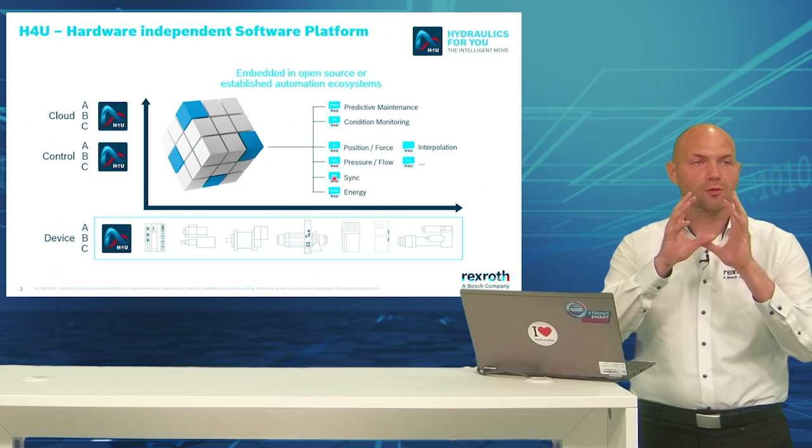What you can see on this slide, on the right hand side here, it mentions that with our H4U software products, we can really run on several devices. So we are hardware independent. This is what you can see at the bottom. Our knowledge that we have in hydraulics, and this is only an example. So everything where we think that we have a big knowledge, we can put into the software, and then we can decide to bring that to several devices, or even to different controls, PLCs, and also into cloud services. This is the general idea of it.

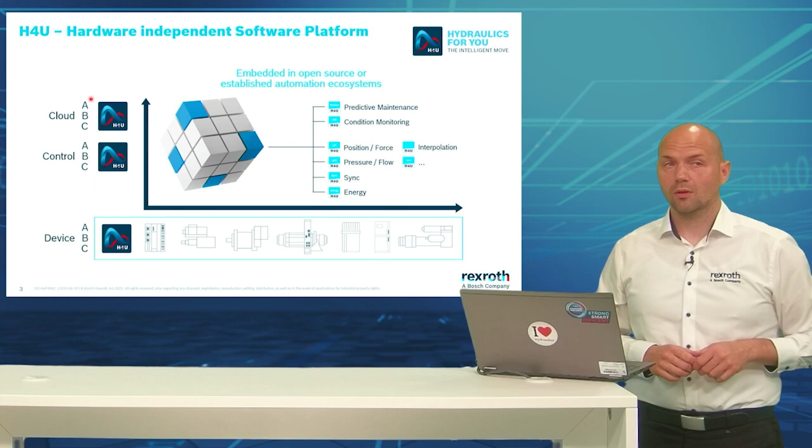And I'm sure it has a lot of benefits and you will talk about it, but now it's again time for an interaction part. We would like to have your answer on what are the most important features of a hydraulic software product today. So is it the functionality, maybe the price, the ease of use, or the flexibility? What will be the most crucial feature you're also willing to pay for? Let's wait for some more seconds. We have 70 people in, 23 answers yet.

It's quite close. Again, like in soccer yesterday, it was crazy.

Okay, 35, so 50% voted. Interesting, very interesting. We talked about this in the preparation. It looks like the ease of use, I think that's what you said. It's a very big element, but the price is not the biggest one. No. And it's even the last one. So that's interesting. So ease of use, functionality, and flexibility kind of on the same level, and then the price. That's a little bit surprising, I would say.

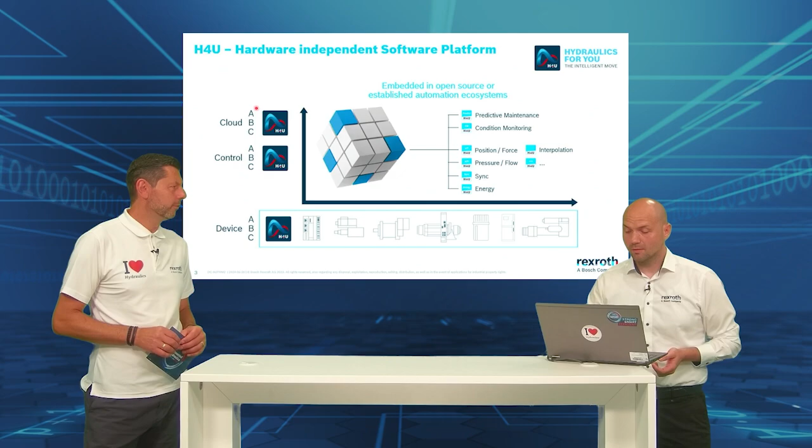Yep, it is. Okay, but from your perspective, what are the biggest benefits of using this platform? Is it the ease of use? Is it flexibility? One very important point for sure is the flexibility, because with these software function blocks, and this is what you can see on the left-hand side, we allow you to integrate our functionality in your control PLC system.

And with that, you can control your actors and read in your feedback signals, your sensors. So you are more flexible, you can choose. It's not a must to do that, but it's an additional way you can do it in future. In the past, in most cases, we brought our hydraulic functionality with our devices, but now we enable you to put this functionality into your machine concepts, and this gives you more flexibility.

And for sure, you can use your existing machine control, and with that we also reduce efforts during the engineering phase, and this saves you a lot of time, because I think the employees in your companies are aware of the engineering tools, and they don't have to learn a new tool.

And last of all, a very important point is we have prepared our function blocks especially so that they fit perfectly to our hydraulic components, especially valves, cylinders or pumps. So we have something like a database in our function blocks where they can communicate with each other.

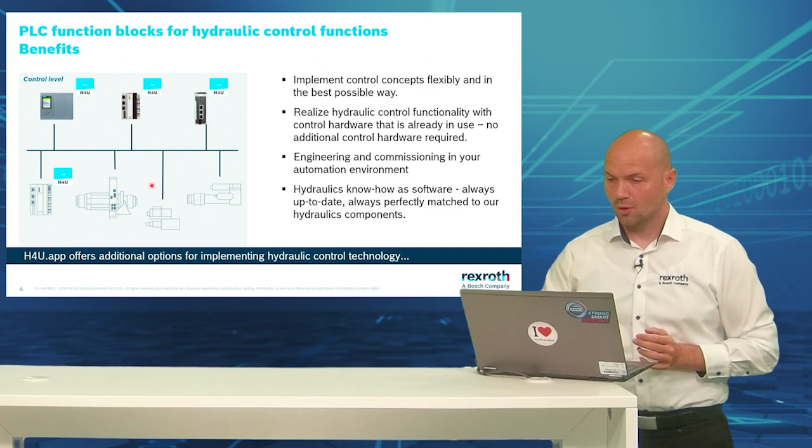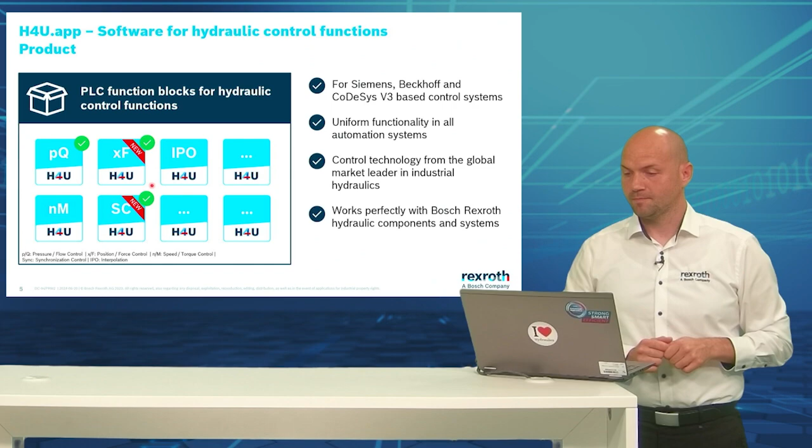So what we see here is the news compared to the last time. You have new products in, as we say. But I also see some icons with 3 dots. That means you're not done, I would say. My question would be, how would you decide on the new functionalities, the new products on this platform?

Yeah, like you mentioned, it's only a starting point where we had some customer feedback and customer interviews. And from that point, we started with what we thought were the most important functionalities, but we are not at the end. So we need your feedback, I would say, to know what could be the next steps on the roadmap.

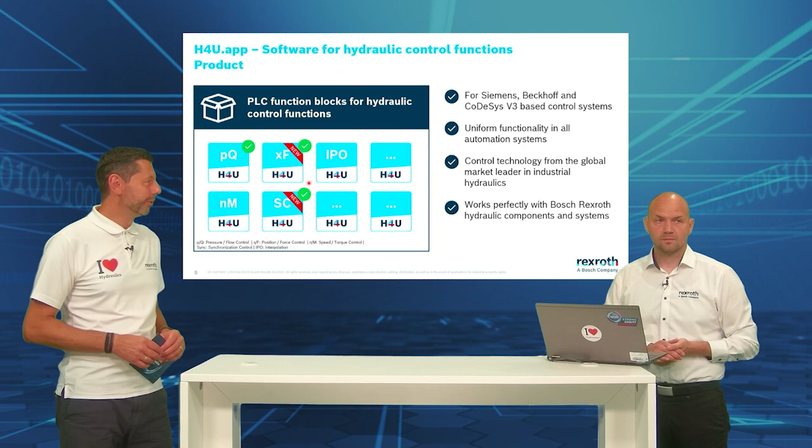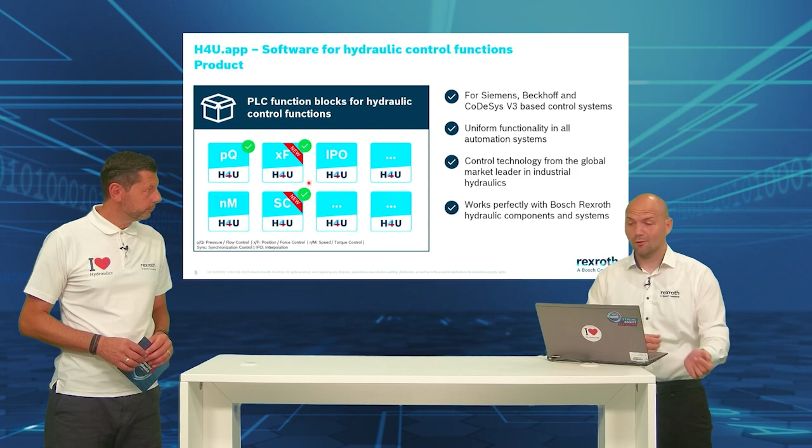Okay, so what will you do next? What would you say? Let's start with the first one. Yeah, let's look at the position force controller. Okay.

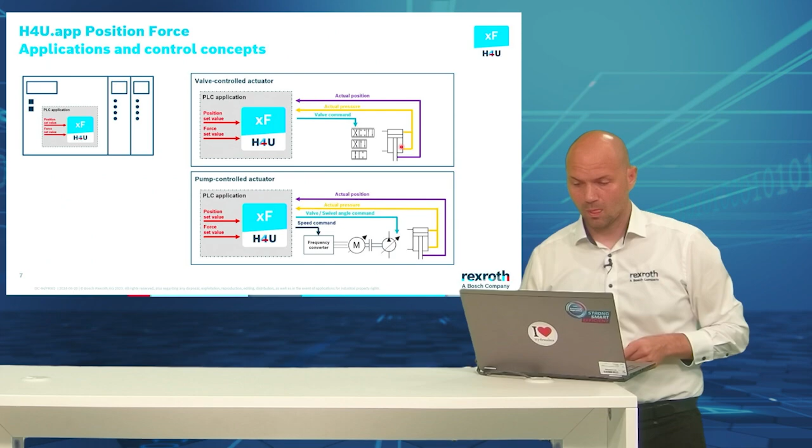Because we have a wide range of application requirements, the position accuracy could be millimeters or down to some micrometers. So a big range. Also the velocity could be 10,000 millimeters per second, going down to 0.1 millimeter per second. Also the force can have a big range.

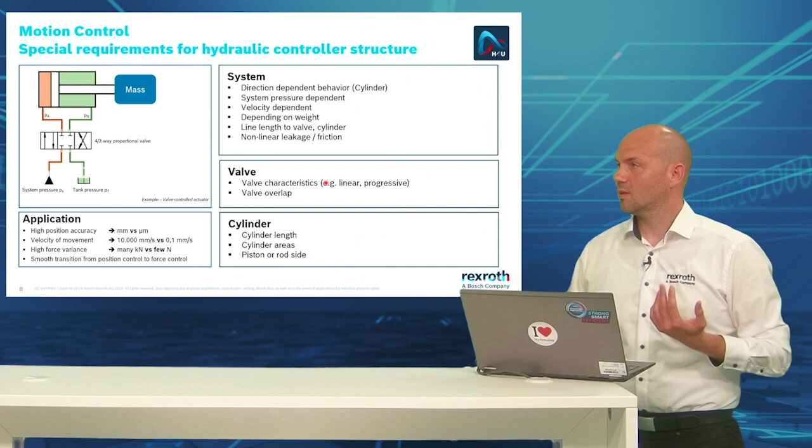And these are a lot of things we have to take care of in the control system. But also, the hydraulic system by itself has some special things to take care of. So the direction-dependent behavior of the cylinder depends on the mass mounted, the length of the lines, and also the valve characteristic. So the valve characteristic influences all of that, and everything is taken into account in our control structure.

Thanks for this. I saw a presentation some time ago where you talked about best-in-class hydraulic control. Based on this, how would you answer the question: what makes you best in class here?

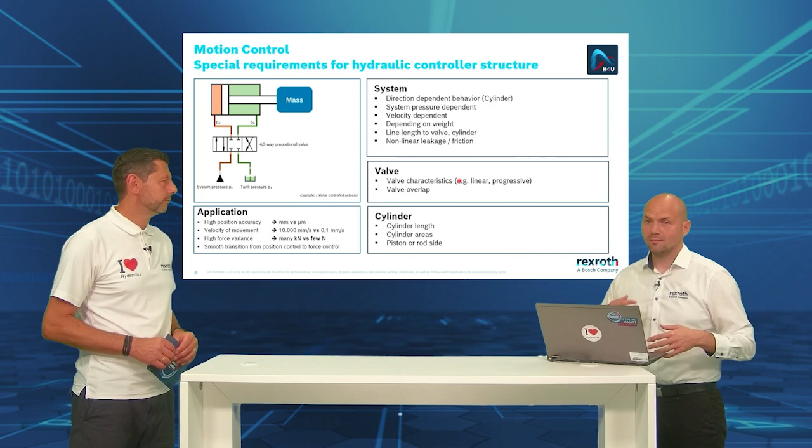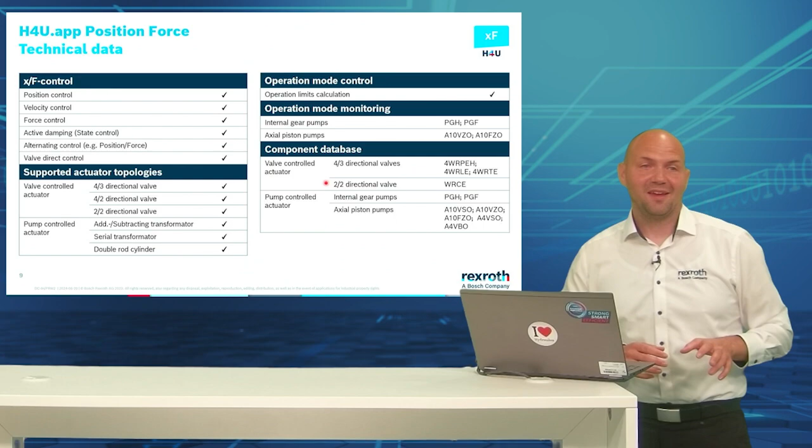Yeah, for sure we have some big benefits, and to answer that question I brought the technical data with me. We have engineers here, so I don't want to go too much into detail, because at the end there's a link to the complete data sheet where you can see all this data. But I think three very important functions that allow you to handle your application well are: first, the position force control with alternating control.

Really, the smooth switching between position and force is a very important feature. Then, for sure, the state control. So if you have application cylinders with a low frequency, this allows you to handle this application and make the control in a good way.

And last of all, I would say the component database is a very nice feature, because you see a short overview of the different valves and pumps we have, and you can easily select one component out of this database. This saves time during commissioning, and you don't have to put in so many parameters.

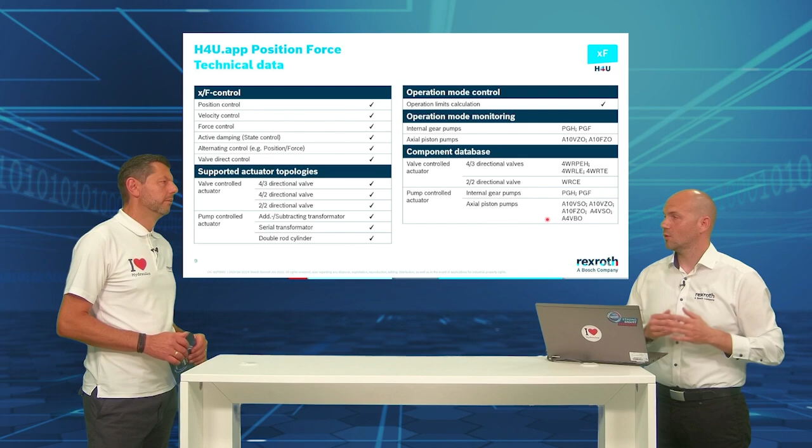Okay, quite valid points, I would say. This technical data is just an excerpt. I think you have a big data sheet available, and we will show where you can find it at the end.

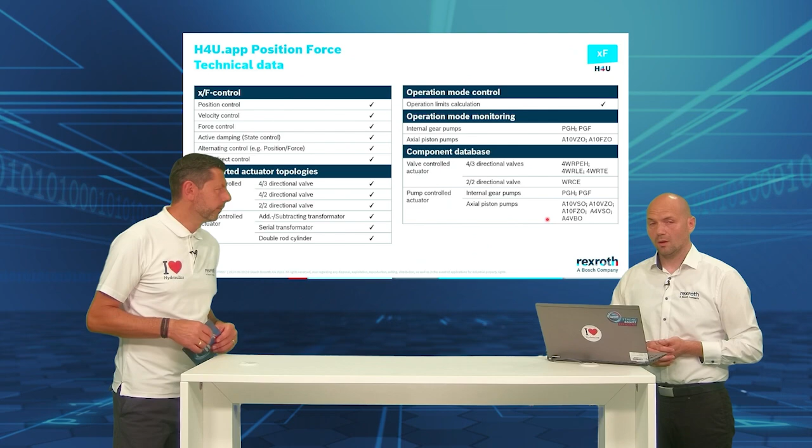So this was XF. There's another one, SC, sync control, or synchronization control. So what about this one?

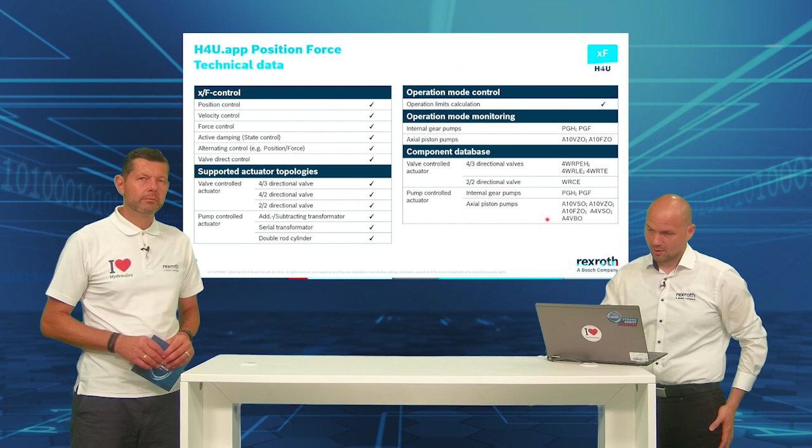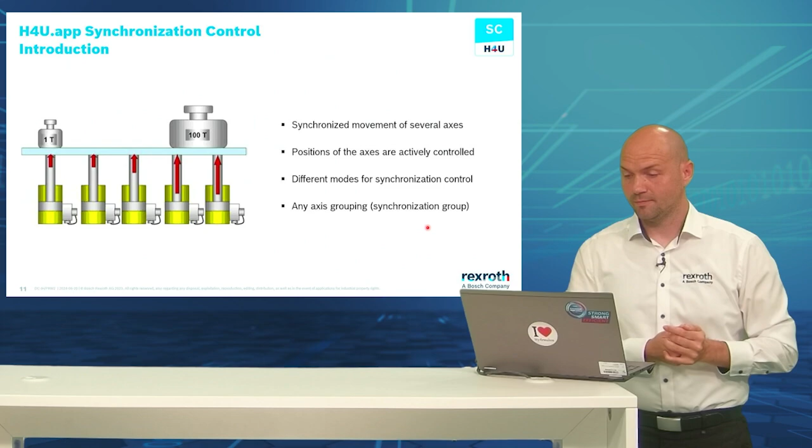So that you have a feeling of how this operating principle works and how you will integrate it: first of all, we need a standard axis controller, like a position force controller, for every single axis. If this works fine independently, then in a second step we integrate the synchronization controller into our PLC applications. This acts like a master, controlling the slave axes below. This minimizes the synchronization error, even if a different load is distributed on your application.

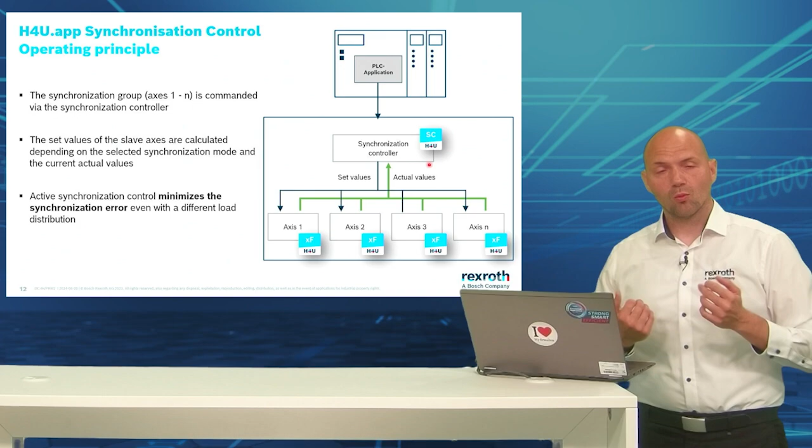Good. Maybe you are wondering, because the range of applications could be completely different and the requirements would be completely different for synchronization mode. For that, we have some important modes integrated into this functionality. I don't want to go too much into detail, but I want you to understand that there are some different ways to solve your application tasks.

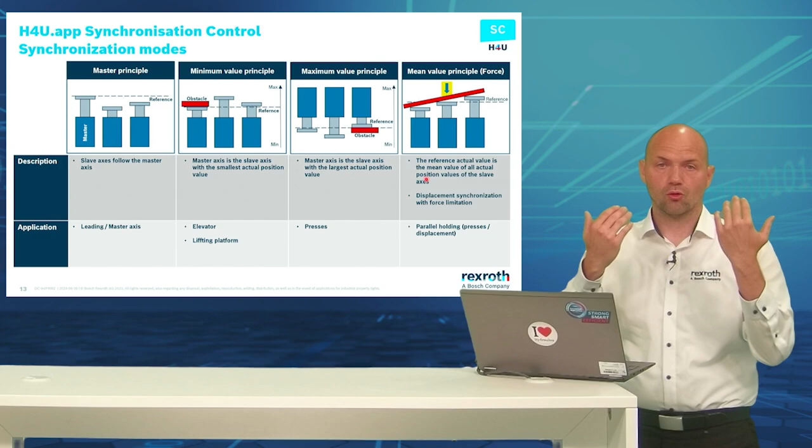So one principle would be the master principle, where every time one axis is the master. Then a second principle is the minimum principle, typically used for elevators or lifting platform applications. The maximum value principle is used when the cylinder comes down from up to down, something like in presses. And then there's also a special mode, the mean value principle, used in presses where we have displacement synchronization. So it's a synchronization mode combined with force, special for press applications.

I like that you show these application examples here already. I think we will have a specific one in some minutes. So this was a lot of info, I think. A lot to digest.

All right, right now I don't see any questions in the chat, so it looks like people have to digest, as I said.

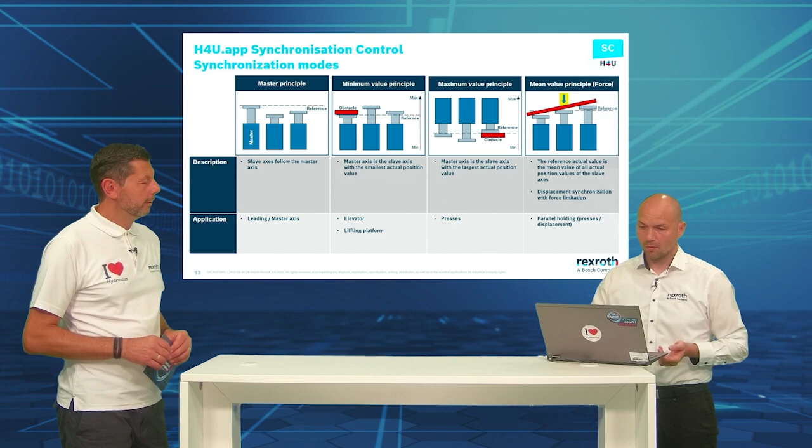Yeah, I'm sure you also have technical data here. Yeah, it's the same like we have it for the position force. So you can see it here, also some important things like the position control, but you can also find it at the end. The link is there, and then you can have also detailed information.

So we have about half time now. It's time for a half-time break, I would say, talking about soccer again.

So you said you want to demonstrate it a little bit more. How would you do it? Yeah, so we prepared something, but I don't want to do the demo myself.

So for that, I see somebody waiting in the background. Hi. Hello, Thomas. Thank you, Florian. We will get back to you in a second.

Hello, Thomas. So I think you're a fresh, new face for the audience here. A friendly face too. Could you say a little bit about you, what you're doing in the company, and especially in the area of H4U? Yeah, exactly. I'm Thomas from the software development engineering department, and I'm responsible for developing these H4U software functions.

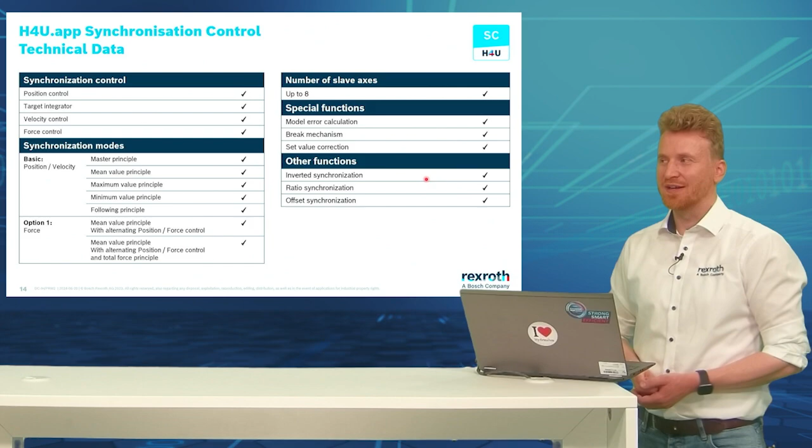So now I understood you want to demonstrate something. I'm missing a little bit, normally we have an exhibit here, so how will you do it today? Yes, exactly. Usually we show our software when we have some cylinders and some pumps, and well, this is not possible here in the small cabinet. We have therefore, I brought a virtual cylinder with me, and with these virtual cylinders I will show the position, force, and the synchronizing control app.

Talking a little bit, just a short second, because I know it's a hot topic also on the Hanover Fair and throughout, talking about virtuality in engineering, or virtual engineering. What is, as you're an engineer, I would be really interested in what does it mean for you? Yes, well, virtual engineering is quite a big topic. To put it simply, it is using digital and simulation tools to optimize and commission your systems, in our case hydraulic systems. And much more easier, I call it, I have my cylinder on the desktop today.

Okay, so demonstration and commissioning, I think that's the perfect words for your demonstration, right? Yeah, so let's see, let's start with it. Okay, so for today's demo, I brought the following hydraulic system.

In the overview, you can see two valve-controlled cylinders, which are in position and force control. The respective cylinders are controlled via our H4U app, position force control. Both cylinders are additionally controlled by the H4U app synchronizing control. Together, this forms the position synchronization. The cylinders and valves are simulated in real time on our controller via our virtual axis module, and together with the apps form the overall demo system. The virtual axes provide the following sensors: pressure in chamber A and B of both cylinders, and the position of each cylinder rod. The valve and its sensors are not considered further in this demo.

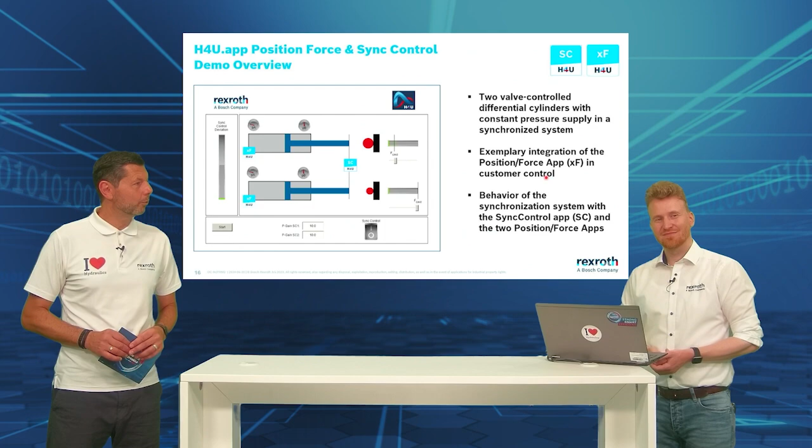So let's see, this is the Rexroth you're showing now. Yeah, I think so. Let's see, 6 steps. I remember from the preparation. Yeah, it's 6 steps. The final demo step. Okay, so let's start with the first 5.

I would like to show you the workflow to integrate the H4U apps in a few simple steps using the Position Force app as an example. The overall application is then visualized, and the behavior of the system is tuned via controller optimization.

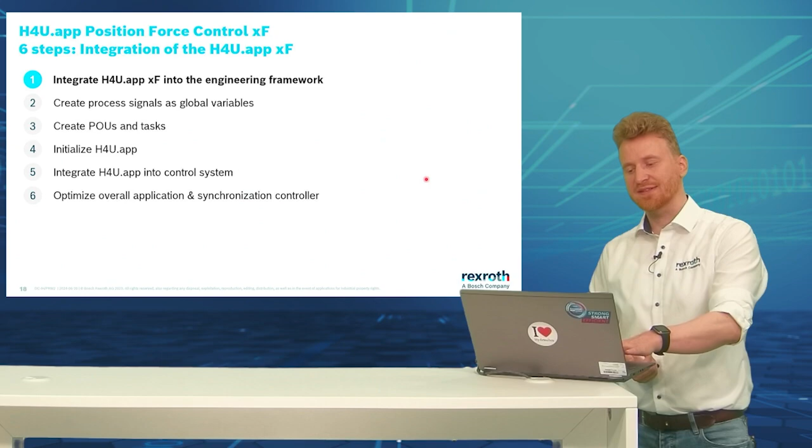My first step is to integrate the app into our engineering environment, in this case TwinCAT 3. We're using Beckhoff in this demo. The H4U app is delivered in a zip file, which contains a compiled library and 2 XML files, which provide an easy to use startup parameter set.

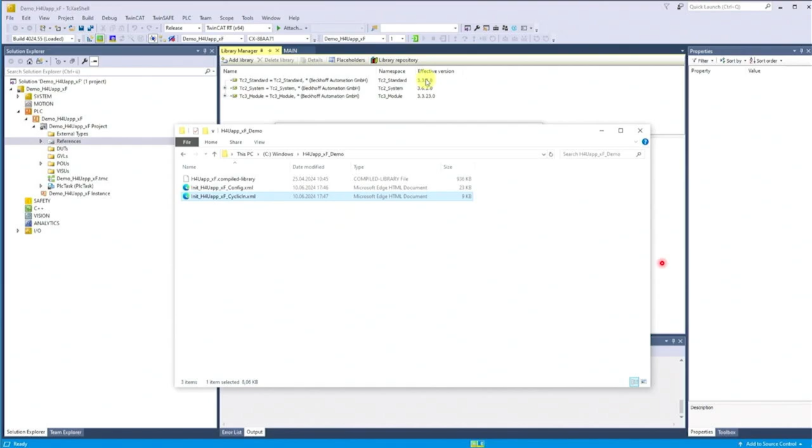Now I install the app via the library manager, and you just have to search for the zip file with the compiled library on your file system, and then open it. The app version 1.00 has been successfully installed already.

In step 2, we now create some global variable lists to get a little bit of structure. The following relevant variables for the Position Force app are created in our global variable list application: the actual force of the cylinder, the actual position of the cylinder, the valve command value to the control valve, and an instance of our H4U app Position Force at the bottom.

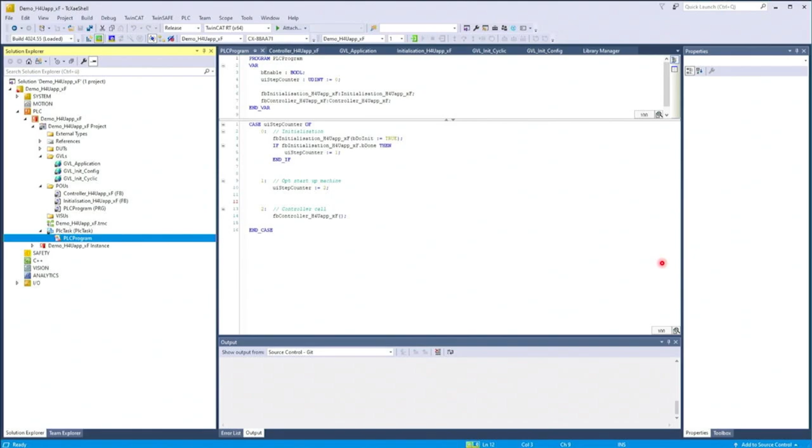Now we switch back to the PLC program. The PLC program calls the init routine once and then calls the cyclic routine of the Position Force app in all future time steps. The sample time for this demo is set to 1 millisecond.

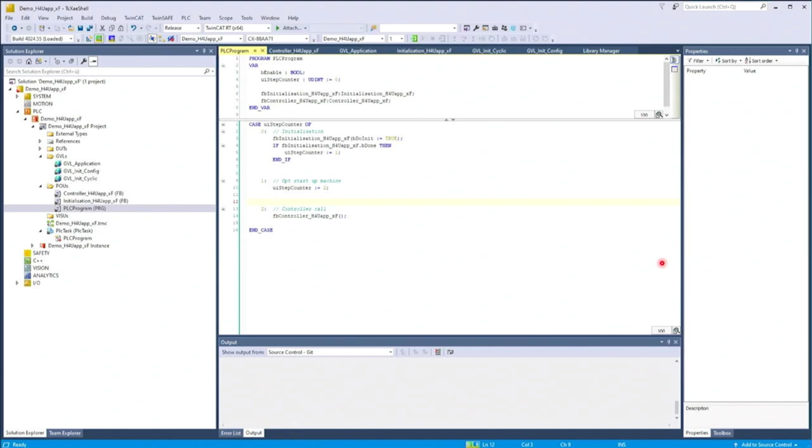So in step 4, we initialize the H4U app. We do this by setting the doInit flag to true. But before we do this, we have to provide the Position Force app with our valve data, which we are using, the so-called actuator database.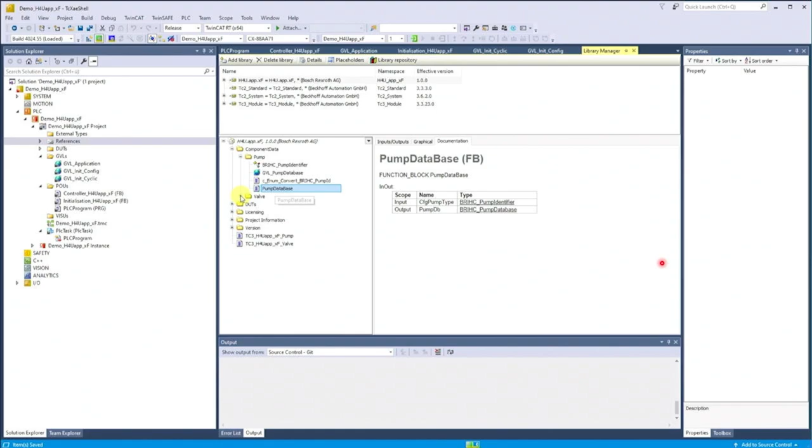You can find this actuator database also in the library manager under references. Here you can see the mentioned component database, and here you can see all the pumps we are supporting for our systems and software, and here also the valves which we are using in this demo.

Next, we need to provide the file path to our license, which is needed to activate the app functionality. Then we write the valve data and the configuration to the inputs of the Position Force app instance. The default values which were provided in the XML files are imported into our global variable list GVL_Init_Config, which you can see here.

It's just a good default set to have fast commissioning. Also, the initial values for the cyclic inputs need to be provided, and we do this from the variable list init cyclic.

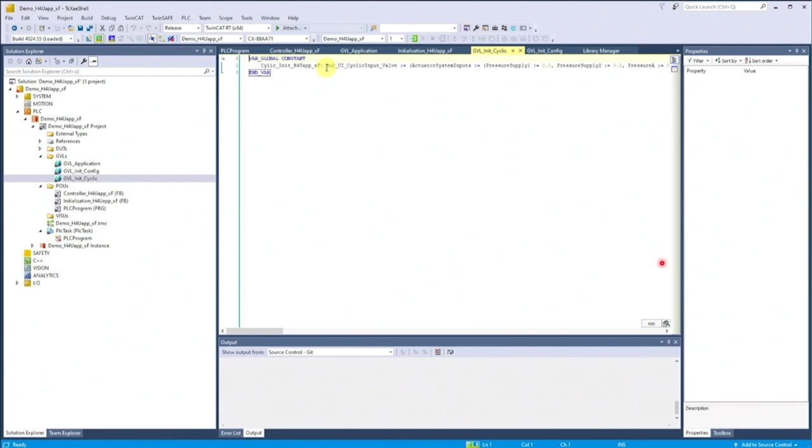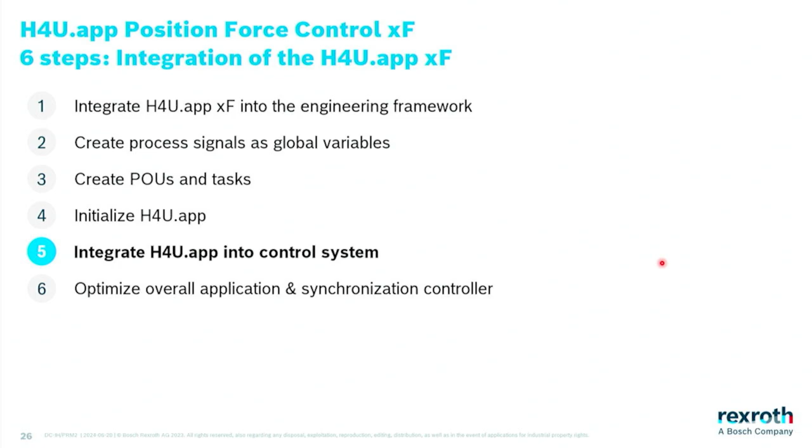Okay, so we're getting nearer to the hot part. Now we want to integrate the Position Force app into our hydraulic control system. The Position Force app offers an option of loading the component data cyclically. This is helpful for systems when you have a switching actuator or you are using several valves and actuators. For this demo case, it's not necessary, but it's nice to know.

Now we come to the so-called input and output mapping. The following cyclic in and out command and actual values are needed: the actual force value of the cylinder, the force command value, and the position actual and command value. Then we just call the FB instance of our app in line 18, and the app is already running.

Finally, in the output mapping, we have the connection to the valve command of our control valve, and this closes the control loop.

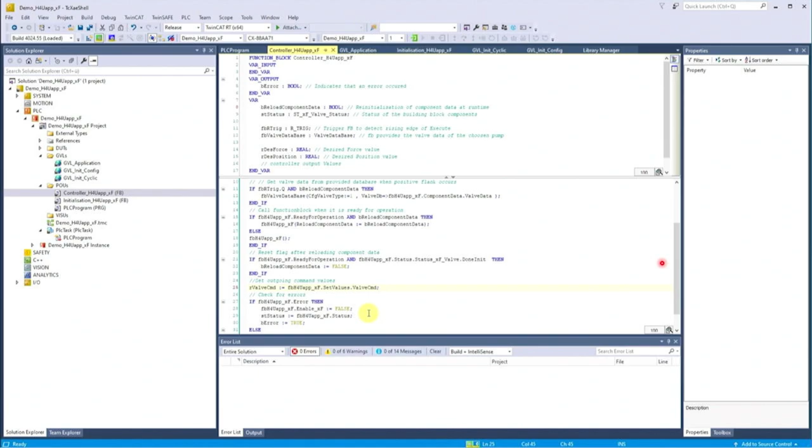So at the moment now, you said this is the setup phase. I looked at the watch—it's even 8 minutes, I think, 7 to 8 minutes. It's less than 10 minutes. Yeah, it's quite cool. So principally the system would be ready, but now it's time for optimization, right?

Yeah, exactly. What do you do there? I brought not just a single cylinder system, but one with 2 cylinders. In our demo, there are different loads, and I want to tune the synchronizing control to work as well as possible. So let's see how this works.

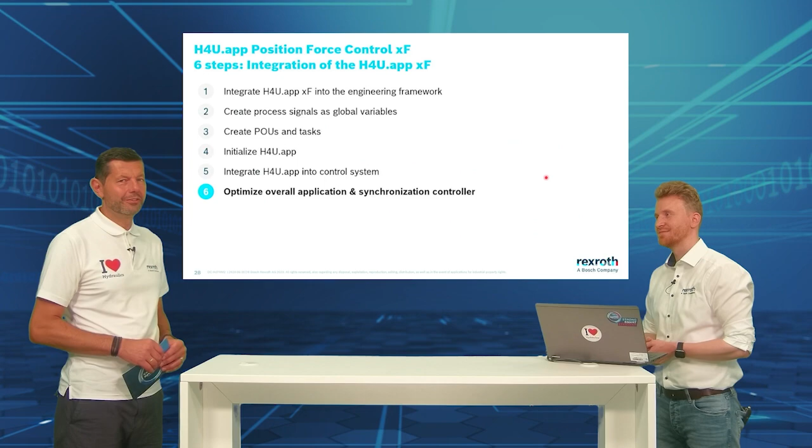Yeah, so finally the overview of the overall application. I have to switch to a prepared demo project. The visualization shows the cylinders with their respective pressure sensors.

The different loads and springs in the form of a red ball, and the possibility to set the limits. On the left side, the control deviation of the synchronizing controller, and on the bottom you can switch on and off the synchronizing control, and you can tune the P gains of the controller. The line marks the synchronizing set point. And you can see in this default configuration without the app, the error is quite high, right in the middle.

And then I switch the app on with default parameters. And you already can see the error is minimized by roughly a half. The system, as I mentioned, has different loads, so we need to tune our controller to this. We do this by adjusting the P gains on the bottom. First we try a number of 10, and you will already see this will dramatically reduce the position synchronization error.

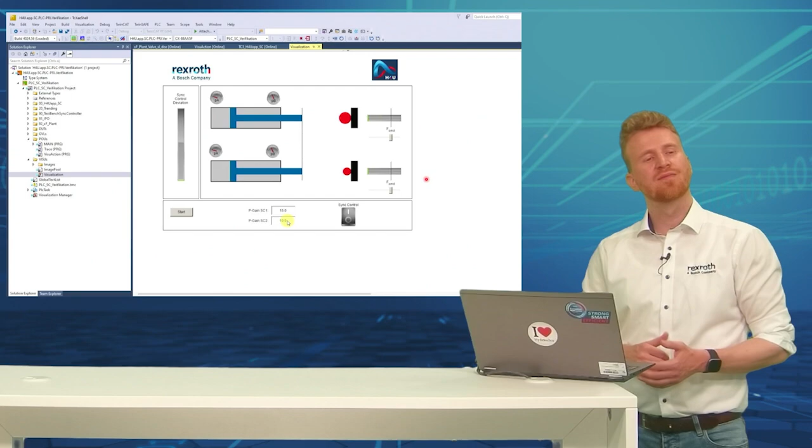I do another try with 15. And a little bit of improvement has happened. And well, another try with 20. And you can see no significant progress was made with this set.

Again, I want to compare the system with and without the synchronizing control, therefore I switch it off. And you see again quite a large positioning error in the synchronizing control, and then I switch it back on. And you see the behavior is satisfactory, so the commissioning is completed.

Okay, so thinking about what the participants said earlier about the ease of use, I think this is really, really easy to handle. For the expert it's also quite good, but this was really impressive for me. So thank you for this. Talking about applications, Florian mentioned several applications. What could be a possible application for this? A possible application could be a hydraulic lift. Okay. So I hope you have some ideas and some impression how easy it is, how this will work out, also about the flexibility of the system.